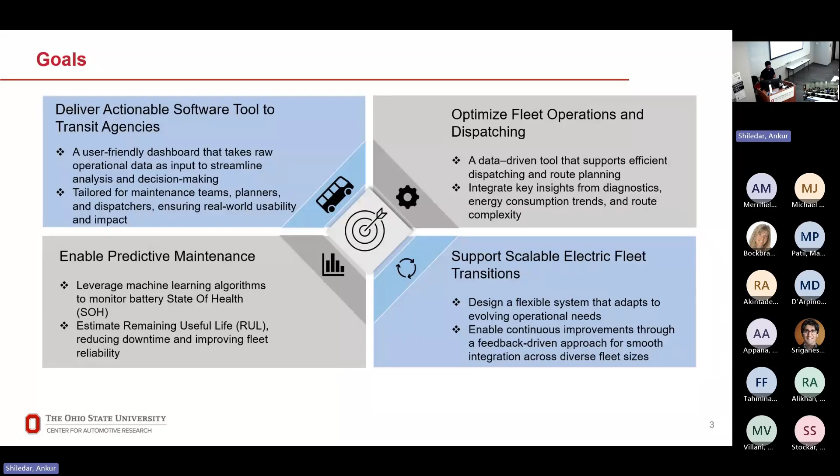With this tool that we are envisioning, this can help these fleet operators optimize their operations and also make them feel confident about electric buses, to make their transit fleets not just have a few buses, but the whole fleet electric in the future.

As a part of this work, we are developing a digital twin of transit bus operations. With this digital twin, we want to analyze how battery degradation happens when the transit buses would be used in operations. To do this, we are taking into account the actual bus operations.

That includes how these buses are driven, what's their schedules, their parking, when they're parked, when they're charged, which routes they travel upon, and what are the weather conditions in which they are used. Finally, we are developing a high fidelity digital twin of these buses, including the powertrain, the batteries, the aging models, and also the driver behavior, because that has a significant impact on the energy consumption and aging of the battery.

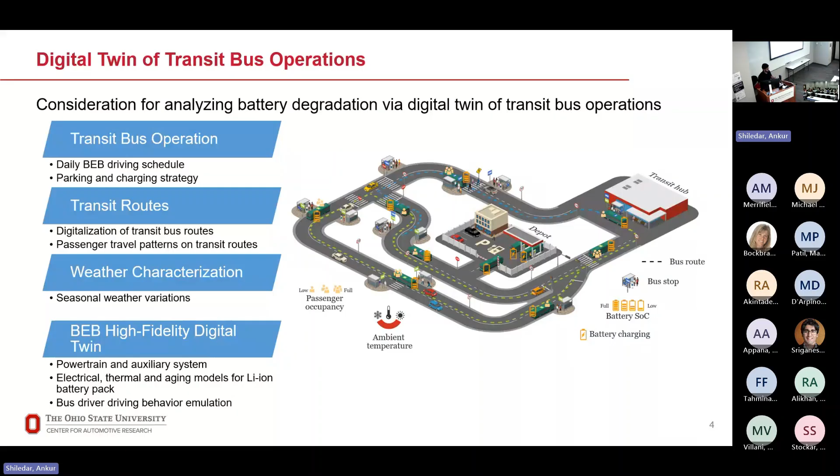This is the main focus of this presentation: how this digital twin of the transit buses performs. This digital twin is developed in a Simulink virtual environment.

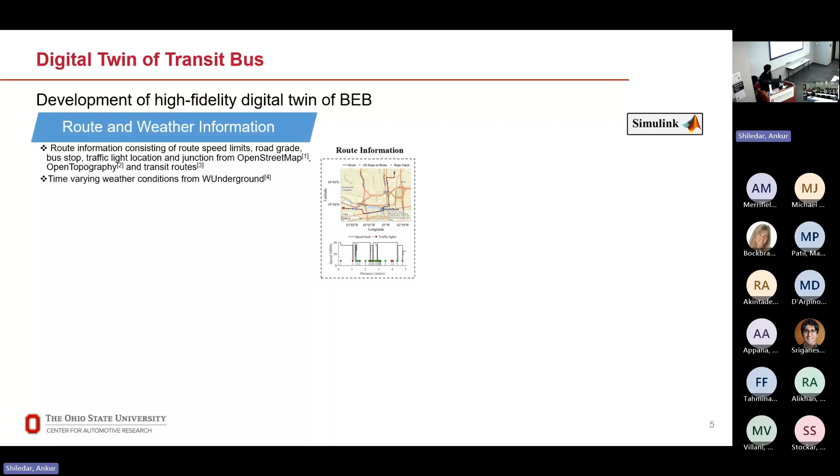Firstly, we gather the route and weather information of these transit buses. The route information consists of the route speed limits, the road grade, the bus stops, the traffic lights, all the traffic location from open source applications such as OpenStreetMaps or Open Topography. We also get the weather information from Weather Underground. As an example, I've shown the route information for a particular route.

Next, we develop a detailed road load model. I guess a lot of you must be taking Dr. Rizzoni's course this year, and you will be learning about this.

You may or may not have learned about the road load model, but in a vehicle there are four resistive forces that a vehicle needs to overcome. These are aerodynamic drag, rolling resistance, inertial, and grade, and the torque provided to wheels produces the traction force to overcome these.

In our case, rolling resistance is a big factor which we have modeled with a very complex rolling resistance model for the heavy duty truck, heavy duty vehicles, and integrates the tire thermodynamics as well into it.

Using the route information, we want to simulate the realistic driving of these in the simulator. So we have used a modified enhanced driver model, which mimics a real bus operator's driving behavior.

Finally, there is a detailed powertrain system, which is a high-fidelity powertrain simulator consisting of an equivalent circuit model and a thermal model of lithium-ion battery pack with the aging, which will be incorporated later on.

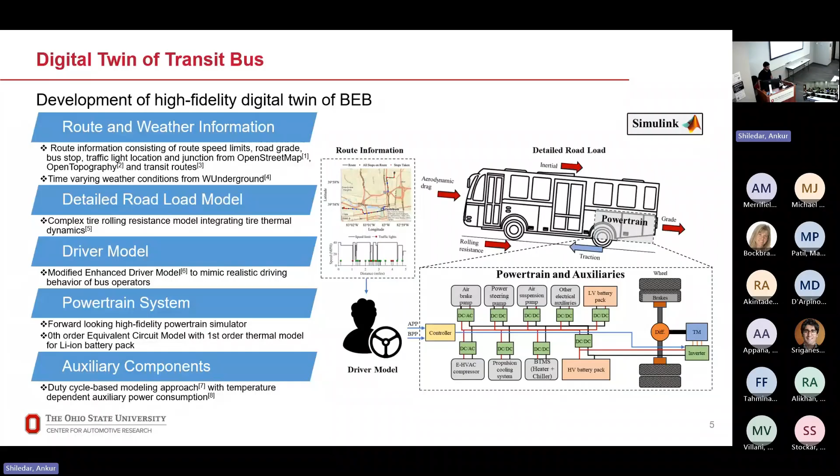In addition to the road load, there is auxiliary power usage, which is also quite important to be characterized. For that, we are using a duty cycle based modeling approach, where major auxiliaries like the HVAC and the battery thermal management system are modeled as temperature dependent loads.

Before I go into how the simulator performs, let me give you an idea of how we are going to do the model validation. For that, we use the real world data that COTA graciously provided us of their fleet.

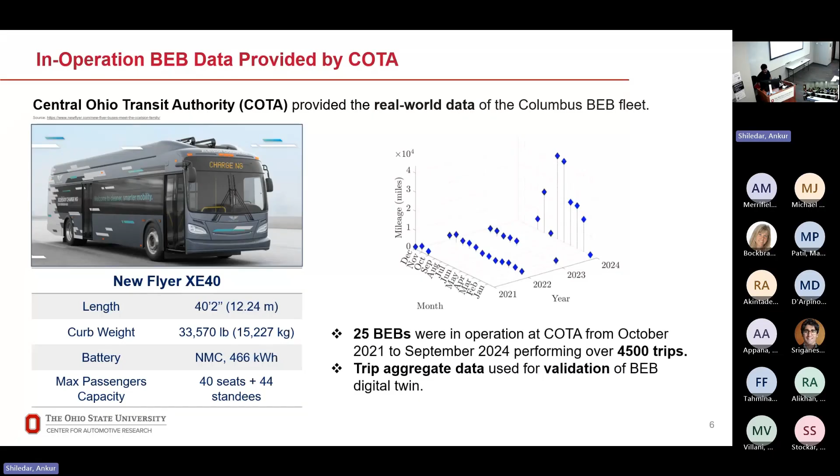COTA has New Flyer XE40 buses in their fleet. They have been using these buses for a few years now. On the plot on the right, it shows how much mileage these buses have covered. Collectively, the data that COTA has provided consists of 25 buses, which have covered around 4,500 trips in the last 4 years. The data we have is trip aggregated, and we will be using this aggregated data for validation of our models, of a BEB digital twin model.

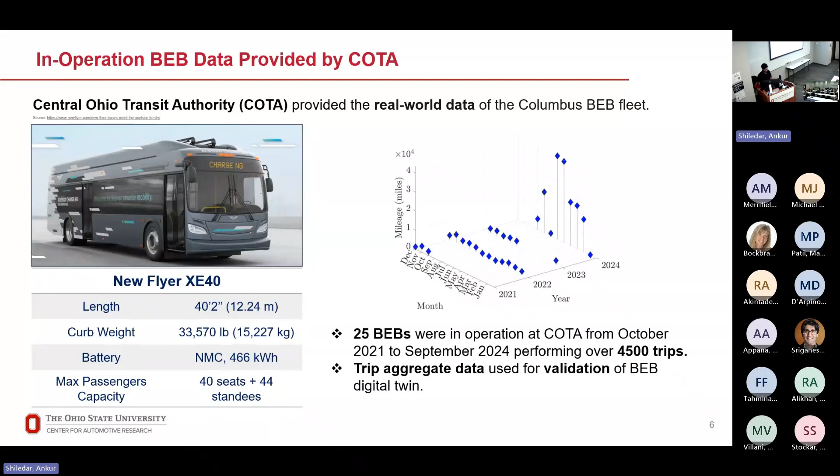Now, I told you we have all these sources from where we're getting the real world inputs for a BEB digital twin. I'm taking an example of COTA Route 31. It shows all the bus stops that are taken. In our simulator we are able to simulate any particular day to understand what would be the energy consumption.

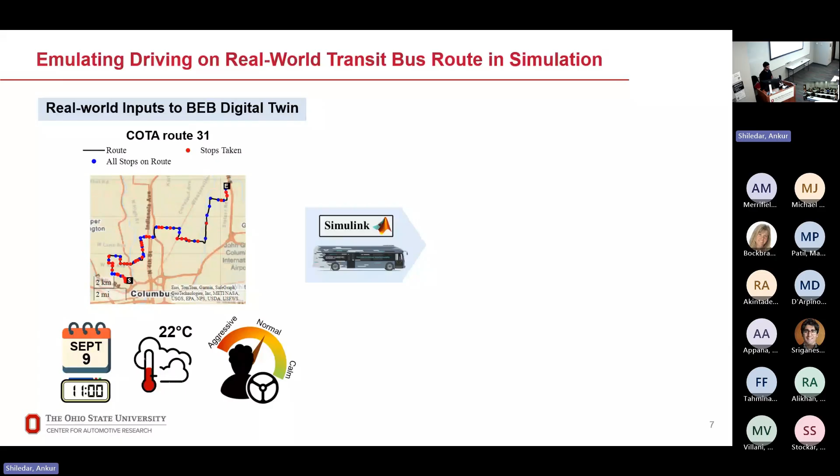I'll take an example of today. If the bus would have been driven at 11 a.m. this morning, the temperature was around 22 degrees Celsius on average at 11 a.m. Furthermore, the driver aggressiveness can be chosen as calm, normal, and aggressive. Here, for this example, I'm assuming a normal driver aggressiveness.

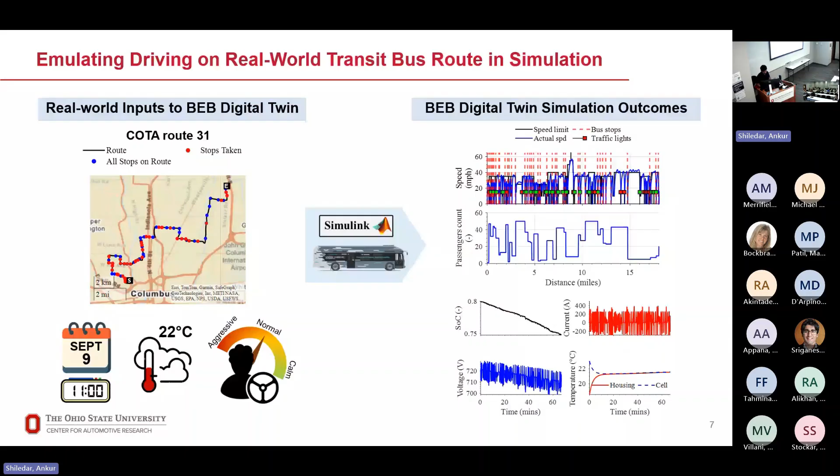For this Route 31, the bus on the bottom, I have shown the signals from the battery. For this route, the energy to battery SOC is depleted by roughly 5% to do one trip on this route. The battery current is between minus 200 to 200, and the temperatures and voltage are shown.

With this, we can perform the energy analysis for this example. We see from the Sankey diagram that most of the energy that is stored in the battery is sent to the wheels, which makes these buses highly efficient, with roughly 80% of energy being used for propulsion. Furthermore, with the regenerative braking that is there, roughly 50% of the energy required for propulsion comes from regenerative braking.

This is with simplistic models, but from the data that we have observed, there is possibility of further improving this, and work is being done to capture that trend in our models as well. Right now, it is around 50% for this example. The auxiliaries in this case are not that much in power consumption. They don't consume a lot of energy because it was a relatively nice day out today. It wasn't too cold or hot.

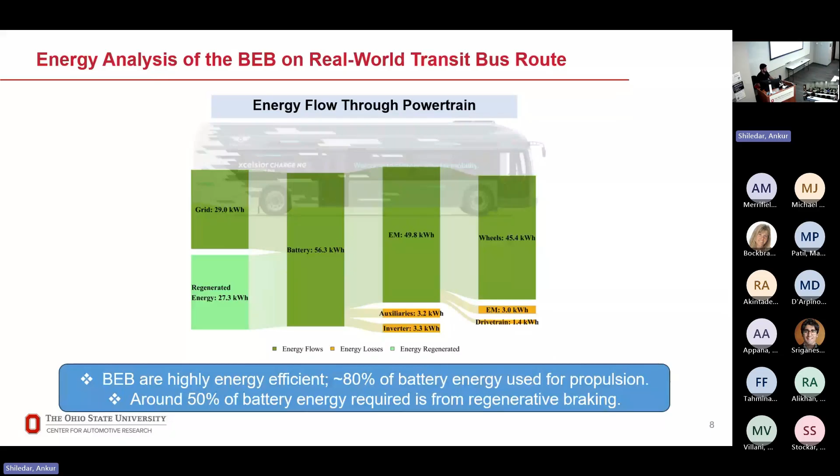Now to do the simulator validation, what we did was we collected weather data for 1 year and simulated thousands of trips using this simulator on the Ohio supercomputer. We varied the days so that we varied temperature and also varied different driver behavior.

And this also shows the capability of our simulator to mimic the real world in simulation, which is something that we started with.

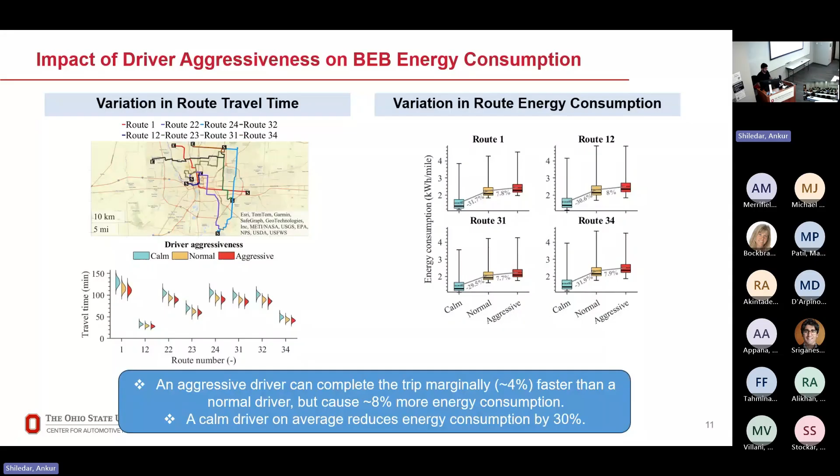Finally, with that, I come to the end of this work. We developed a high fidelity digital twin of these BEBs, which incorporated detailed road load models, powertrain model, lithium-ion battery model, and with this we were able to capture the influence of ambient conditions, particularly temperature, the differences in routes and driver aggressiveness on auxiliary and BEB energy consumption.

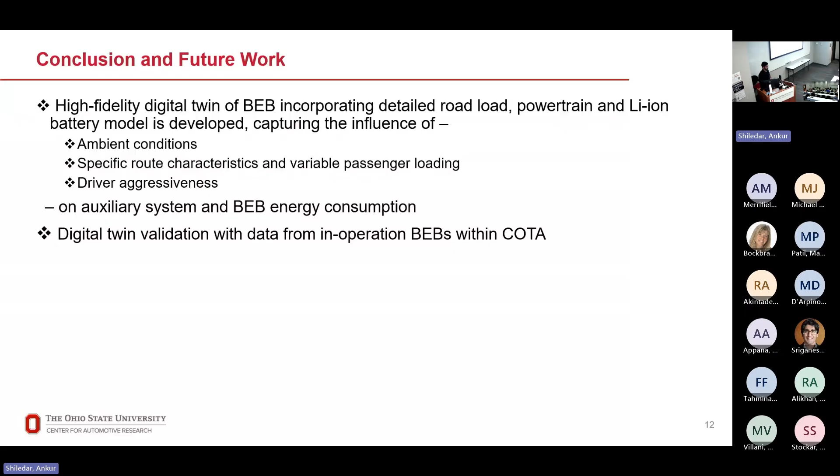We were able to validate our model with the in-operational data that COTA provided to us. We also performed a large-scale simulation study to assess the impact of weather variation and driver aggressiveness on BEB energy consumption.

With this, the next steps that we are working on is to further improve the model, including an aging model for the battery, to understand how the usage of these buses in day-to-day operations will impact their lifespan.

These buses have a large capability to recuperate energy through regenerative braking, which is something that needs to be further studied, and we are working on that to improve our models for better regenerative braking strategy, and refinement of the auxiliary component model is also underway.

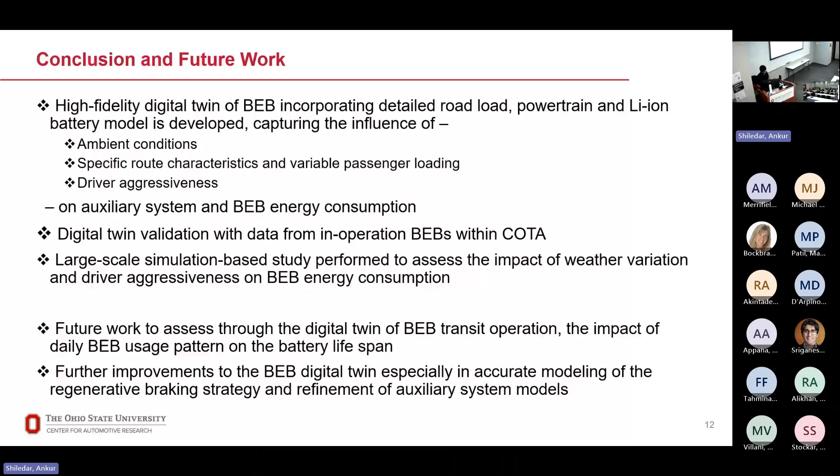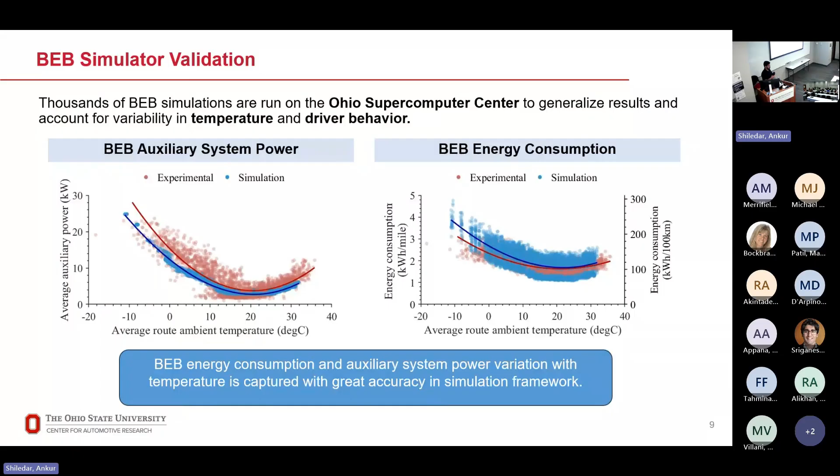I don't think that would be a viable strategy because these buses are expensive, and if you're only going to use the buses in a particular season, the rest of the time they'd be sitting idle, which might be detrimental to their battery since these are battery electric buses. It's not like they won't age — even when sitting, they will have calendar aging going on. So probably not a good idea.

But do you design for winter and then over-design? I think that's what bus manufacturers must be doing right now, because thermal comfort is a must for the humans in the buses as well as for the battery. So developing for the worst case scenario is something these manufacturers must be doing.

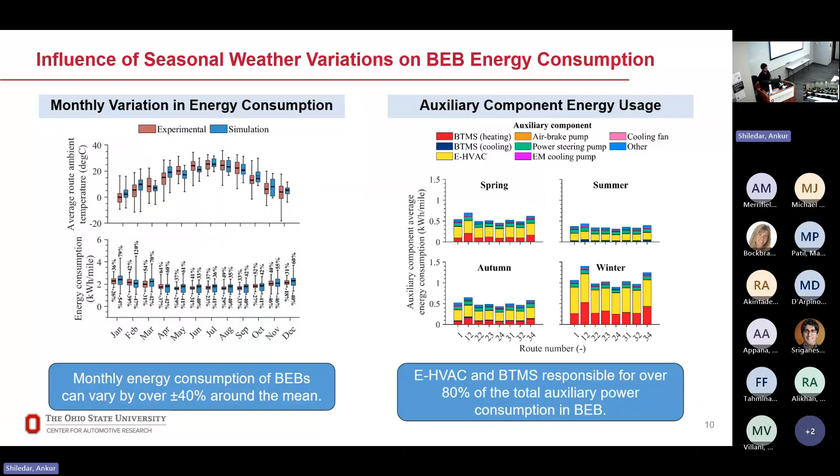There's actually one last question online. Oh, Ankur. Oh, sure, I can. We'll have to.

Professor Sagar is asking, if you're not familiar with the concept of a digital twin, can you explain what's the difference between that and a model?

The work we are doing would seem like a model, but considering all the aspects that the bus will experience in the real world is what makes it a digital twin. We are not using regulatory drive cycles. We are simulating the buses on real world transit bus routes, and considering real world time varying weather conditions that these buses would go through. So all this, I believe, makes it a digital twin rather than just a vehicle simulator.

Thank you for the question, Professor. Yes, I think there are some other comments, so let's read it. I think Athar has a question. Thank you for your presentation.

We did this type of study on a school bus fleet recently. My question is, how are you capturing the door open effect in your model? And similarly, how are you capturing the effect of passengers inside the cabin of the bus, and the window effect, on your energy consumption?

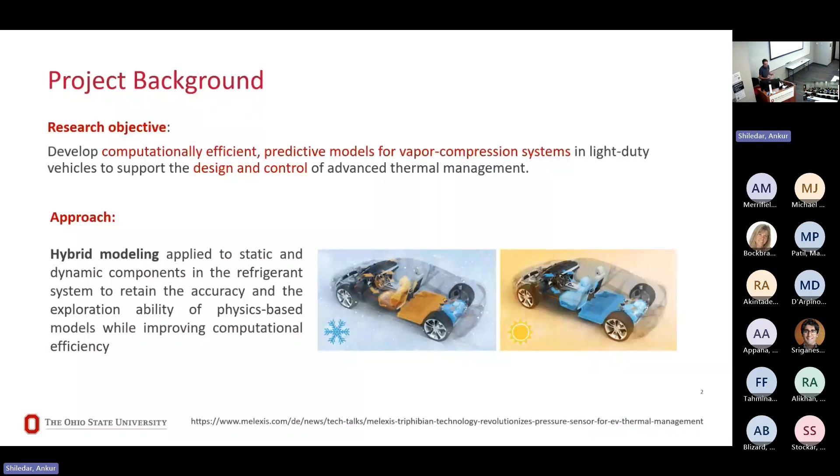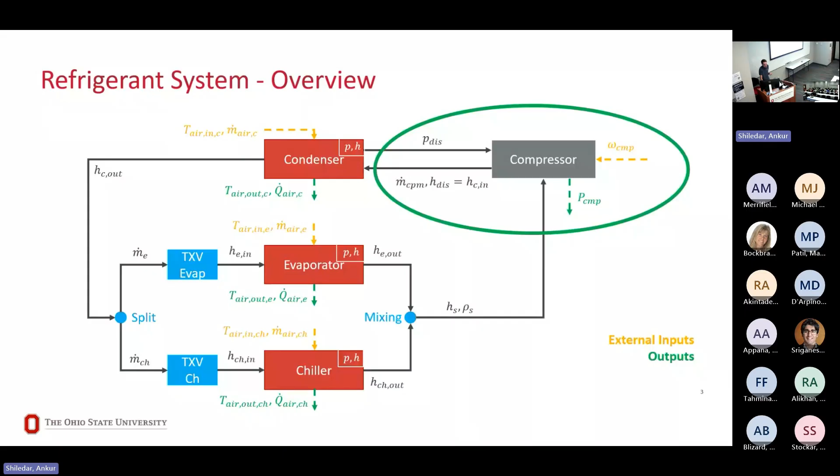This is a quick overview of the whole system we are trying to model. Specifically in this presentation, I'm going to focus on the development of a static map for the compressor to predict the isentropic and volumetric efficiency, which are necessary to predict the whole efficient system in the vehicle.

What is a scroll compressor? So, basic introduction: scroll is a recent geometry that is used in the automotive industry for economical advantage, but also because they are known for their efficiency and their reliability.

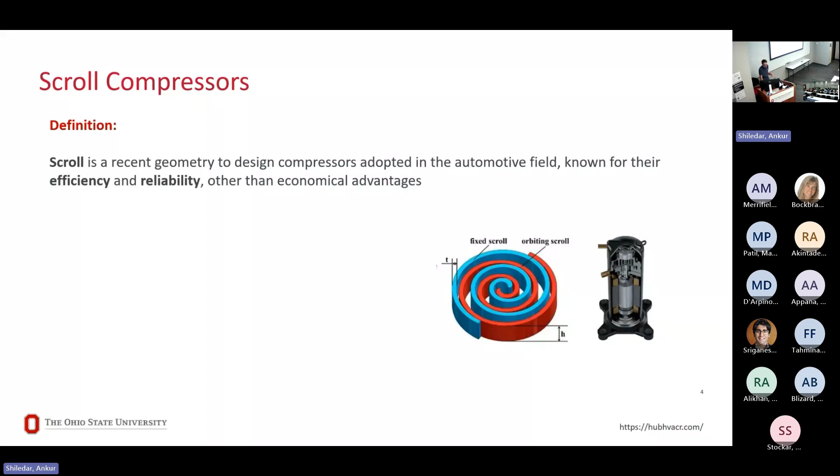This kind of new technology has properties we're interested in from a mathematical perspective to develop our model: these are fixed displacement compressors, so the volume of gas per unit of time is constant, but they're variable speed, so speed is an input we need to consider in developing the model.

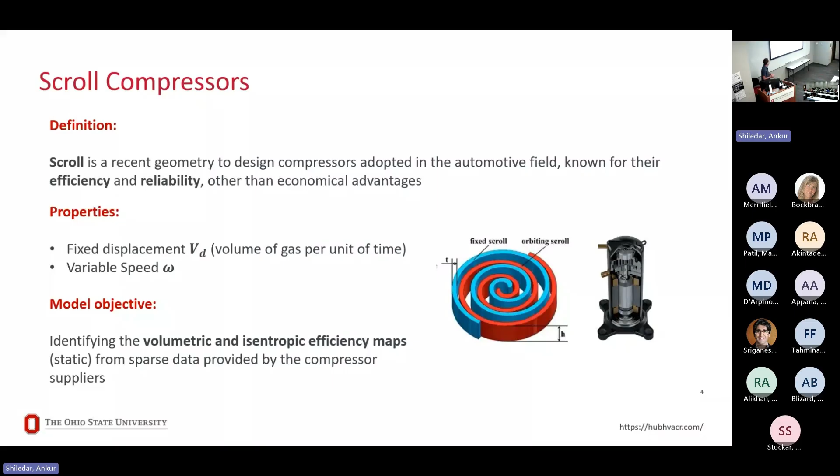The objective, as I mentioned before, is the identification of the volumetric and isentropic efficiency maps. This is done from sparse data usually provided by the compressor supplier to the automotive developer.

So why do we need to work and do research on this specific topic? Because data are often provided by suppliers, and the data are limited to a near optimal range. So we don't have a wide data set covering the whole range of operation of the compressor, but usually only limited experiments run by the supplier.

So all the startup, shutdown, and other conditions that are common when the component is integrated in the vehicle are not represented in the data set available to develop models for the specific compressor component. This happens because experimental testing is costly and time-consuming, so it's not always possible to do more testing and provide more data.

Another problem is that while running some simulations, we notice that 30% of the points in the simulation are extrapolating the trend. So they're outside the boundaries of the range that is tested and provided in the data set by suppliers.

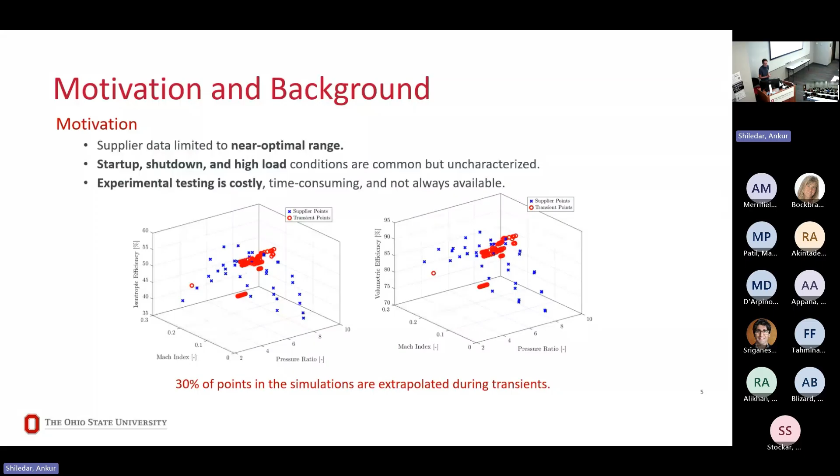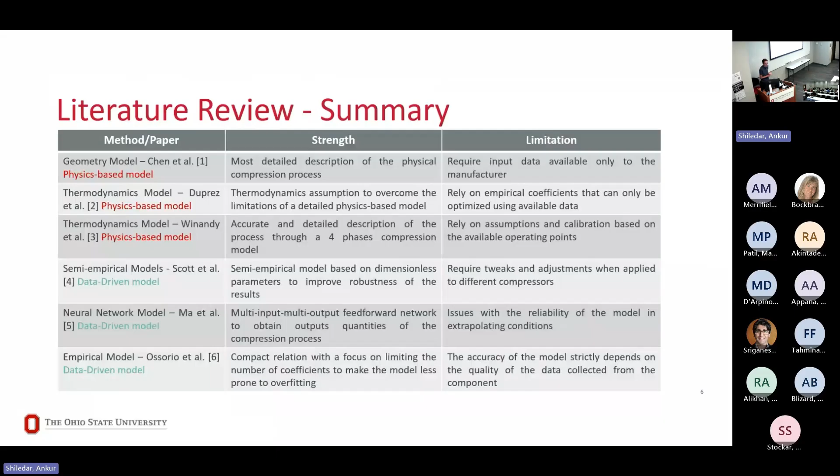So the idea is that the state of the art in this kind of modeling can be divided mainly into two big groups: the physics-based and the data-driven models. The physics-based models are usually based on complete thermodynamic equations for the working fluid, and they need the complete definition of the geometric parameters for the component.

And since every detail and every step of the compression process is modeled through specific equations, these models are usually known for their high computation time. And they require extensive data about the compressors that are not always available.

On the other side, data-driven and black box models can achieve high accuracy in predicting the compressor behavior and performance, but the downside is that the accuracy is subject to data availability, and that's one of the main problems in this kind of setting. There's also no actual physical guarantee on model performance when extrapolating outside the boundaries of the training dataset.

So the objective, considering the positives and negatives from these two approaches, is to try to learn the compressor map from sparse data and extend the models so that they can work well and be robust across the full operating range, while maintaining some sort of interpretability so we can guarantee model performance in extrapolating conditions.

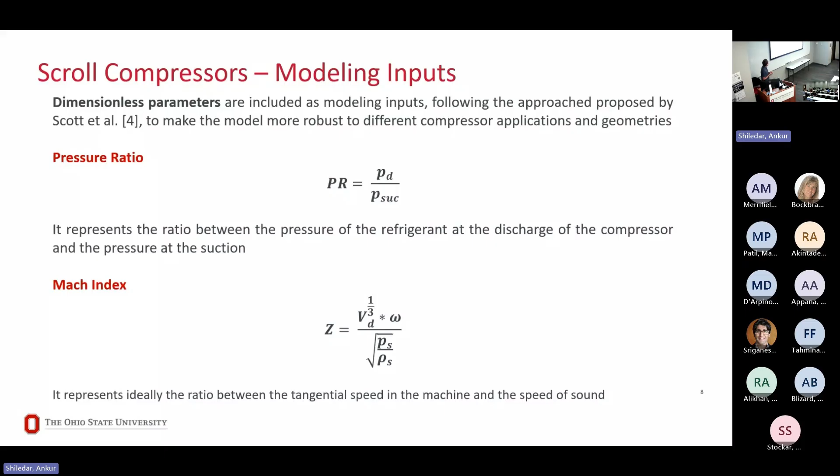They represent the ratio between the pressure at the exit and at the suction of the compressor, and the Mach index represents ideally the ratio between the tangential speed in the machine and the speed of sound. These are two parameters that represent the inputs we have available at the compressor during the simulation of the refrigerant system.

And we want to predict the volumetric and isentropic efficiency, as I said before. These are two quantities: the volumetric efficiency represents the ratio between the actual mass flow rate displaced by the compressor versus the theoretical mass flow rate.

So this is one of the measures we use to assess the actual performance of the compressor when it's working and applied inside the whole vehicle simulation and the refrigerant system specifically.

The isentropic efficiency instead assumes an isentropic process, computing the enthalpy assuming that the refrigerant in the compressor is undergoing an isentropic process.

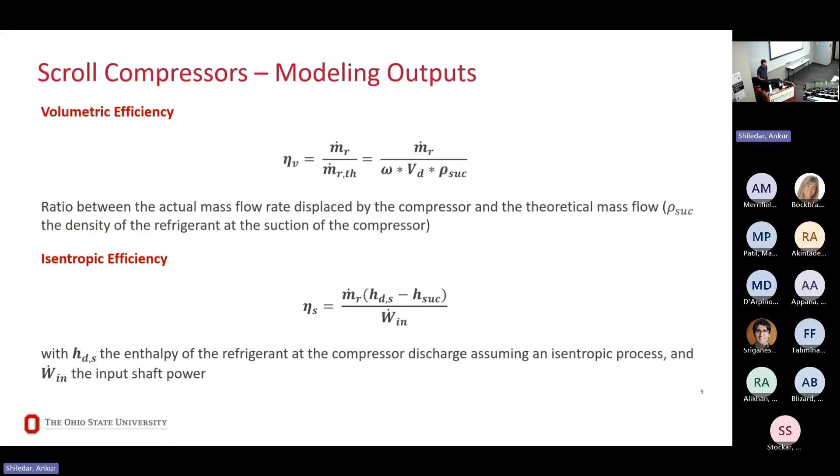So these are two quantities important to assess the performance of the compressor, and they're also important in the refrigerant system to predict some of the main quantities we need to develop a model for the other heat exchangers - for example, the mass flow rate and the power of the compressor, which are two key quantities we want to derive from our model.

So the approach that we are taking is to integrate classic data-driven approaches with some kind of advanced physical knowledge of the system and physical constraints to control the behavior of the system in extrapolated conditions, by applying a symbolic regression approach.

For those of you who are not really familiar with these algorithms, symbolic regressions encapsulate different models, in which we are not trying only to identify the optimal parameters, but we are also trying to identify at the same time what is the best model and what is the best parameter.

In what sense? In the sense that the search space we are exploring with these algorithms is not just a set of coefficients, but we are also exploring a model space made of analytical expressions. So in simple terms, we're looking for formulas using operators, starting from basic addition, subtraction, and moving to whatever kind of unary and binary operator you can think of based on your inputs.

The algorithm is a multi-objective optimization algorithm, so we are not only trying to find the optimal expression based on accuracy, but we are trying to balance accuracy with simplicity, based on a definition of a complexity metric in the algorithm.

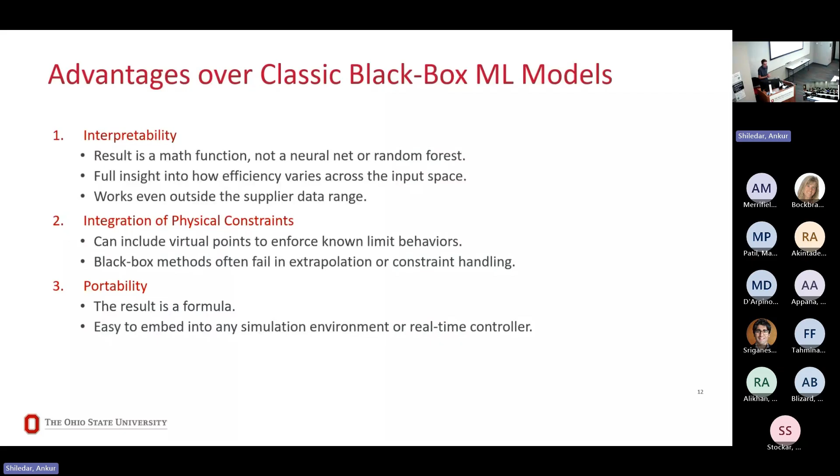And portability. So the idea is to incorporate this model with the whole model for the refrigerant system, and this is easy to embed in any simulation environment, and eventually in a real-time controller.

The way to incorporate physical constraints is basically done in three steps. We start by modifying the loss function, which is the final optimization goal for the algorithm. So we are not only including a classic MSE metric, but we are trying to add different terms to force greater penalization on candidate functions that do not satisfy the imposed physical constraints.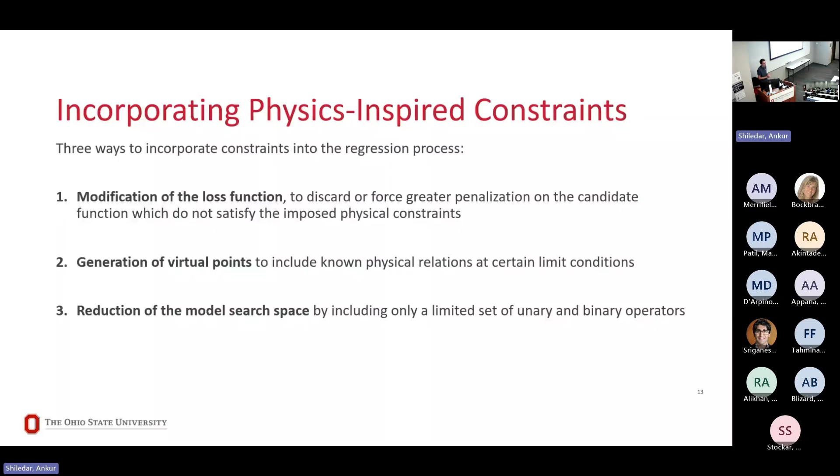Again, I mentioned we are generating these virtual points, and this is something that usually does not work in common machine learning approaches, considering that here we are exploring a different model search space. And we're also reducing this model search space of candidate expression functions by including only a limited set of unary and binary operators that we know from previous work are expected to be observed when modeling efficiency maps in compressors.

I won't go into too much detail about the single constraints, but the idea, for example, is if we know the behavior that we are expecting from the efficiency maps, a specific limit condition, for example, when the pressure ratio goes to infinity or goes to 1, those are the two limit conditions that we are not actually observing, but represent the two boundary limits of the input space.

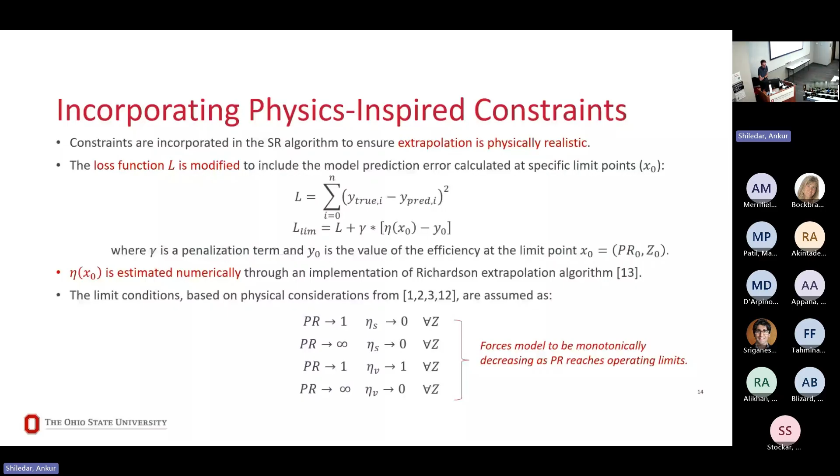We can modify the loss function to include an extra term that penalizes this function when the prediction of the limit is way off compared to the actual known limit we know from theoretical study on the behavior of scroll compressors. So for each candidate function, we estimate the limit numerically, and again add an extra loss term to penalize those functions for which the prediction of the limit is not coherent with the physical result we expect.

We can do that based on a set of four physical considerations derived from different theoretical work on scroll compressors. The same approach can be done with gradients. If we know generally the behavior of the efficiency maps when the pressure ratio or the Mach index are increasing or decreasing, we can add extra penalization terms to penalize candidate expressions that don't satisfy the sign of the gradient in specific ranges of the input space. This way we penalize more the functions that don't show the behavior we expect in terms of the derivative compared to one of the two inputs.

Okay, so these are the two main constraints. This is the whole algorithm and the way we are integrating constraints into it. The idea is to train and see how this overall framework can be applied to different compressor geometry conditions.

So one of the things we want our model to succeed at is not overfitting specific data, not just interpolating data in a small range of operation, but being a model that, since it's based on specific known physical constraints, can be applied to different compressor geometries - different displacement parameters, different refrigerants, and different speed ranges - so that the model can be easily exported to different kinds of compressors without having to retrain or redevelop the whole framework and modeling steps.

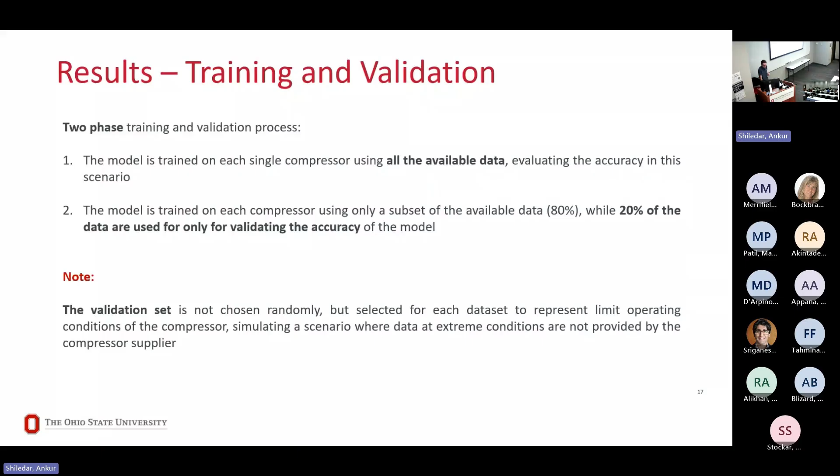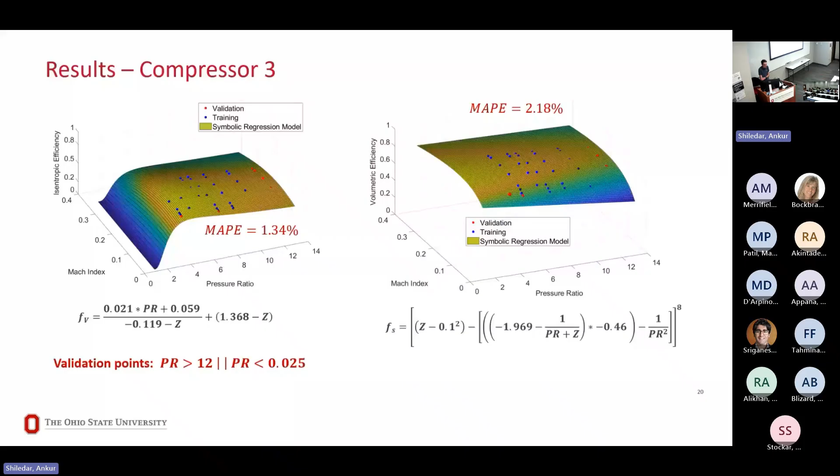You can see the slightly lower errors here, and again the condition we are applying to define the validation points. Finally, also the results for compressor 3, where we have another condition for the validation points, and the errors again are lower compared to the first compressor, where the data are provided by suppliers' sheets.

An interesting thing I want to mention before ending the presentation: here we have a couple of the different errors, and the performance is satisfying. We'll generally be able to keep the errors in the range between 1 and 5%. Again, we are not trying to find the model with the best accuracy based on the data available, but rather one that is possibly robust when we don't have data covering the whole input range.

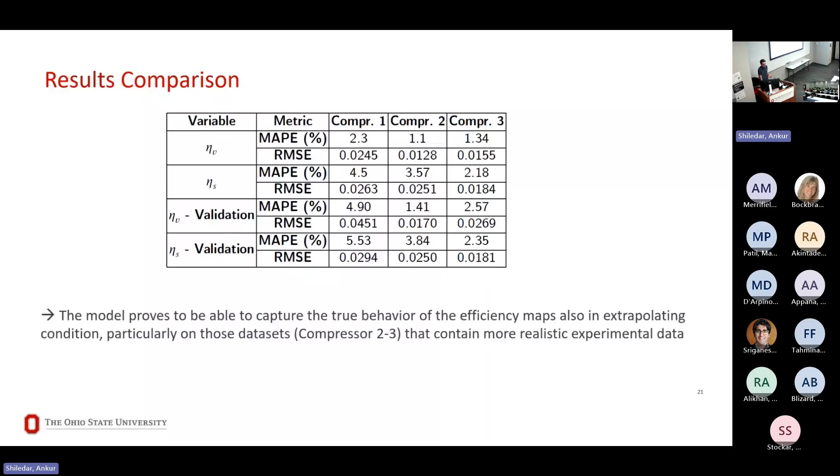The way we are trying to validate this is by comparing our model with some common semi-empirical methods available in the literature. What we want to do is compare the prediction of mass flow rate, which is one of the key outputs we can derive from the volumetric efficiency map. The idea is to see the performance of the three models, ours versus the literature models, when we are using the whole training dataset to train the model.

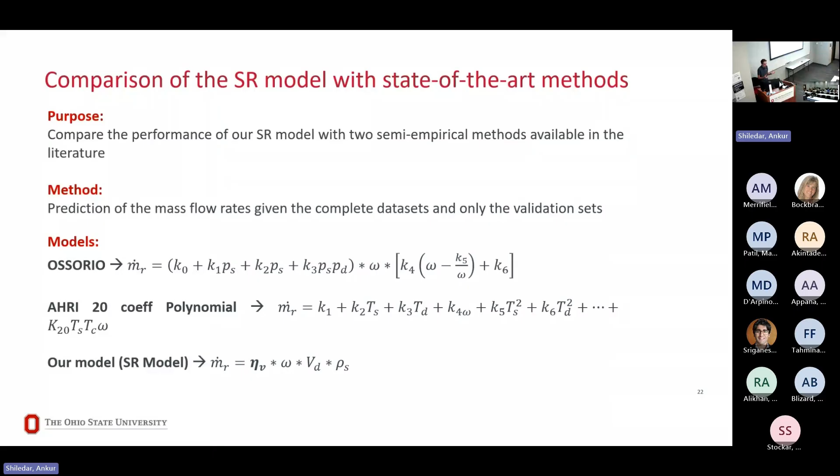And then, what are the performances of the three models when we are removing some of the data at the extreme conditions of the dataset, the boundary conditions. It's interesting to notice how, in general, our model compares well.

When we are using all the training data, we see only higher errors for our model when training compressor 1 with all the available data. This is interesting, and probably also shows that our model achieves the lowest error when we use compressor data that is experimental, more realistic, and represents the actual dynamics of the physics of the compressor.

But the most interesting thing is that when we train the data, removing some of the training points and then testing on those points to see performance on unseen scenarios, we can see how some of the classical approaches achieve very high two-digit errors, so 15 to 20% errors.

We can see how this model can achieve near-perfect accuracy when training on all the data, where it's actually overfitting the dataset we have available. But our model, which is maybe less accurate sometimes, for example for compressor 1, when we remove some of the data and try to predict unseen conditions, can be more stable and robust, achieving a consistent level of accuracy, while the other models risk completely losing their predictive power when applied to conditions different from those in the dataset.

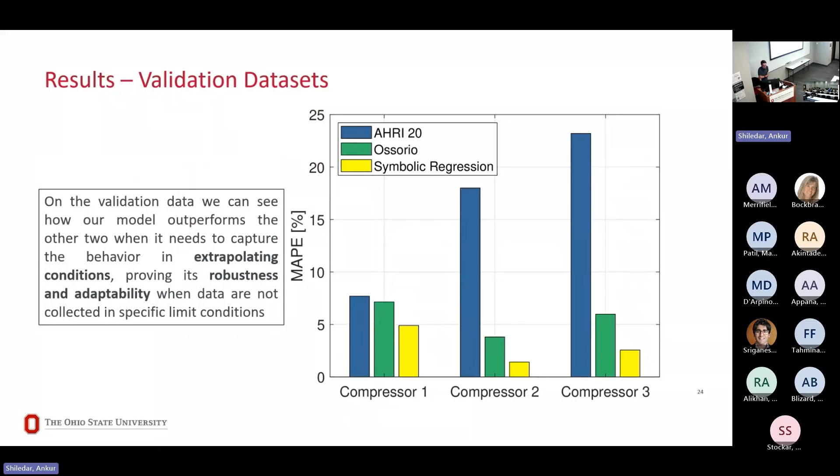To conclude the presentation, the idea of this work is to develop an interpretable, physically consistent, and robust model, so that in the end we can obtain static efficiency maps for scroll compressors. This is important because the model is then integrated into the simulation of the whole thermal system for lightweight electric vehicles. So it's important to obtain physically consistent results, so the simulation of the whole system is more robust and consistent when developing a data-driven model of the whole refrigerant system. The model is validated on data with varying geometry, refrigerants, and different collection methods.

We integrated this model into high fidelity GT-suite models that are used, for example, in our project by Ford. We had the opportunity to test whether our model can improve the extrapolating performance of the compressor in simulation on the high fidelity physics-based model.

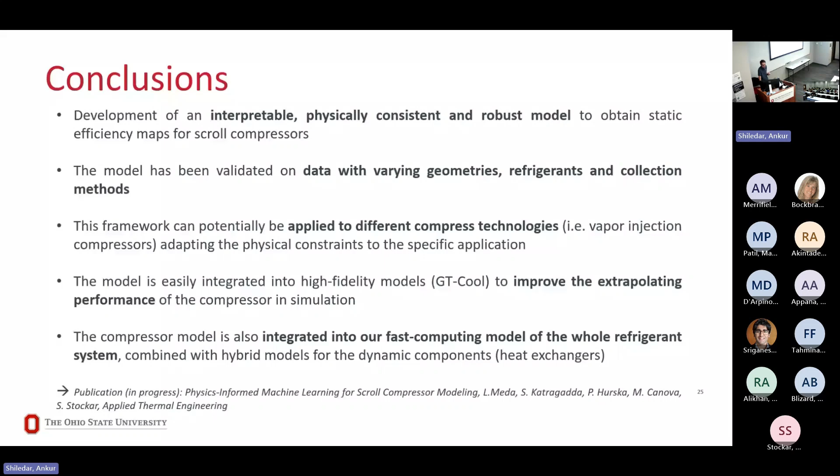This work is the main topic of a publication now in progress that we are submitting soon. I want to conclude by thanking Ford Motor Company's University Research Program for supporting this work, and specifically Sunil Katragadda, Patrick Hurska, and Judy Che, who are part of the team developing this work on Ford's side.

With that, I conclude my presentation, and I'm happy to answer some of your questions. Thank you.

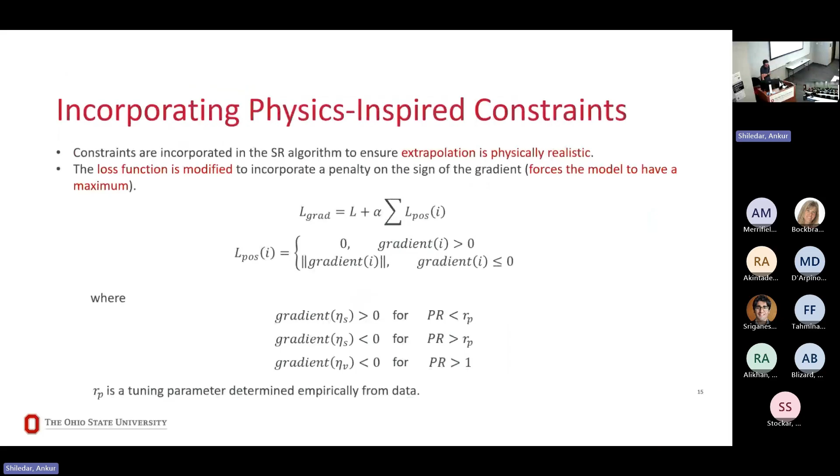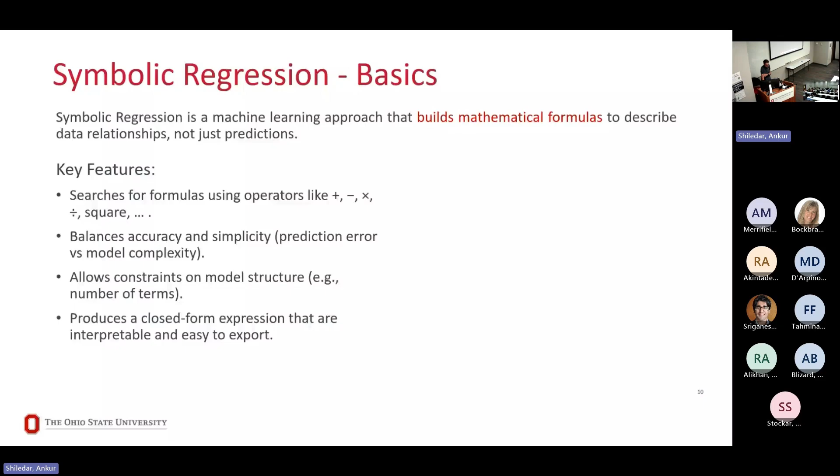So you mentioned at the beginning that there are some physics-based models. How similar do the surface plots of the results of those look to the surface plots of your functions? So the idea is... it's not important, but the idea is I cannot apply these physics-based models.

The thing is, to apply these physics-based models you need specific geometric parameters provided by suppliers. These parameters are not available in general, they're only available to suppliers, and are not made public when the dataset is shared. So these physics-based models can only be developed by the suppliers who know them, or a university research team that has their own compressor and knows every compressor parameter exactly. So I cannot generate a map for a full comparison for this reason, we're not able to develop these models.

You said that the compressors you have, are they similar in performance, or quite different? Because the maps you obtain, are they completely different for each, or are the equations also quite different from one another?

So the idea is they are different in how they adapt to the different data, but we do observe some coherent pattern between the different models. For example, we always want to observe the bell shape for isentropic efficiency versus pressure ratio, and we see it in different ways. For example, in compressor 1 it looks like this, and here we have the same bell-shaped relation between isentropic efficiency and pressure ratio, again adapted to the data.

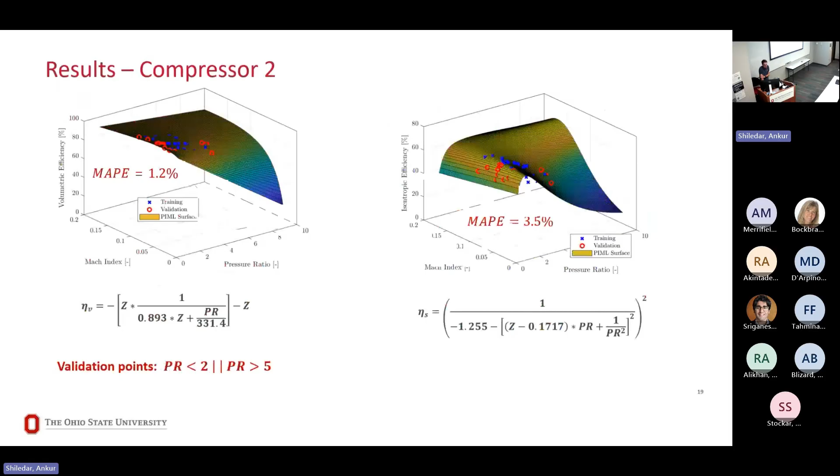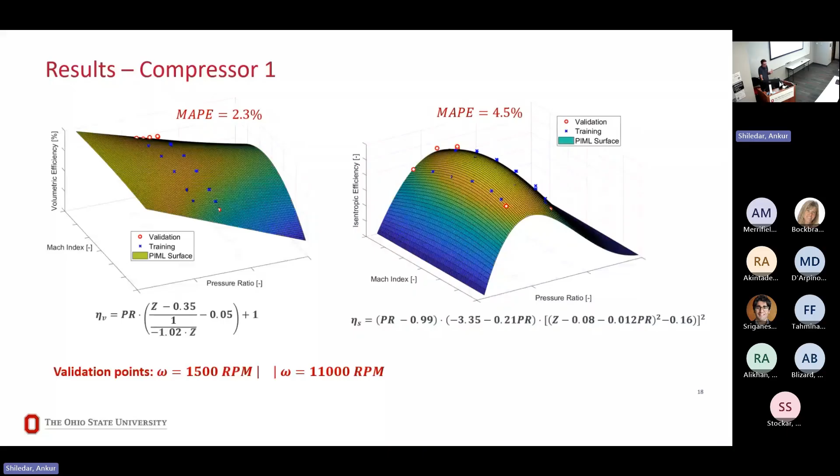For example, the location of the maximum for the relation between isentropic efficiency and pressure ratio depends on the geometric parameters of the compressor. So each compressor will have the same general shape, but slightly different based on its specific geometry. The general shape and limit conditions are the same for each compressor, but the final output is adapted based on the data, reflecting the specific geometry of the compressor, which differs according to the refrigerant being used, the displacement, and other conditions specific to that compressor.